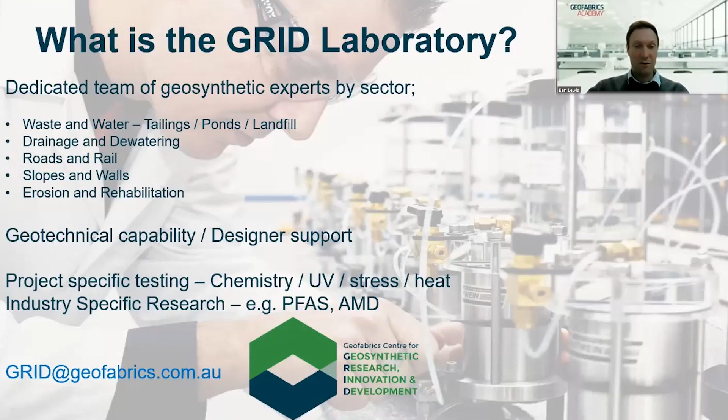But in terms of liner-specific performance testing, we do a whole range of stuff. We're doing UV testing of geotextiles and liners, chemical compatibility and liner protection testing of polyethylene liners. So that's HDPE and LLDPE, as well as GCL liquor compatibility testing. And we're doing drainage testing, shear box testing. So a whole range of stuff that's relevant to the mining industry to show you how it's going to perform maybe on a slope or with the leachate that you're expecting.

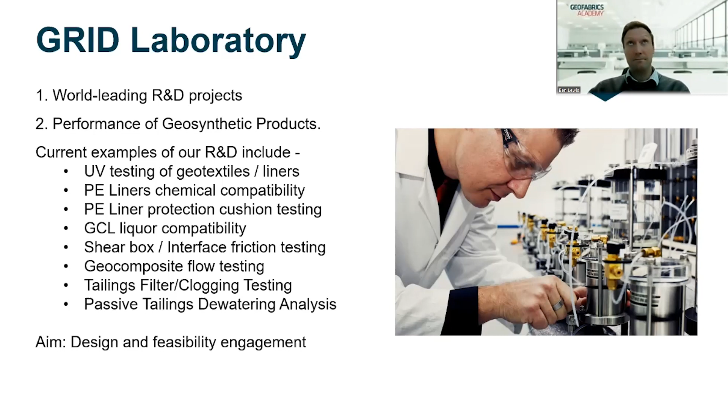So we do have a lab report which shows you what we're capable of, and I can share that with you separately as well.

So in terms of the liner testing, the immersion testing, we can either do one-month screen testing, which allows you to really compare materials. So it's a quick test, basically thin film accelerated testing where they thin the membranes down, accelerate that degradation process. Or you can do it over a 12-month period, which allows you to predict longer term lifespan of those materials. Obviously time doesn't permit to do that always, so sometimes a screen test is adequate, but you do need time up front of these projects to do this type of stuff.

So engaging with us early on is critical. Obviously thermal testing, UV, interface shear, and cushion testing are the primary tests I'd suggest that we do in the lab in the mining sector. So as I said, you do need time up front. It's something that needs to be considered in feasibility, or by the time you get to the design phase, it can be even a bit too late.

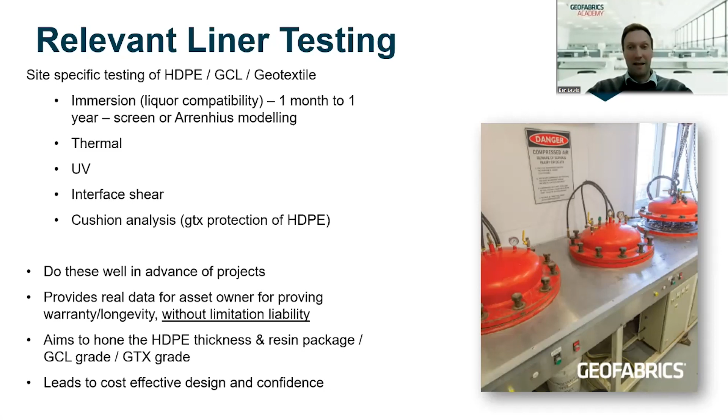So just engage with us, keep in contact. If you've got any questions about durability concerns, we can work through that with you. Essentially the aim is to hone and give you a product which is going to last the standard time in your application. And it leads to cost-effective designs and gives confidence that it's going to last. Sometimes it might cost you a few dollars more, but it's going to last, and you're going to have minimal maintenance on these materials.

In terms of mining applications, the higher risk projects where you would consider doing this might be tailings dams, residue ponds, filtered tailing stacks, processed water ponds, hydrocarbon bund storages - maybe less mining there - or brine storages where you've got high temperature and high saline conditions, heap leach pads, and these all have different exposure risks.

Could be chemistry from heat or heat from chemistry, sun exposure, UV, shear, stresses from trafficking or from loads from heap leach pads, etc. So there's a whole range of exposure risks that are different depending on the application, and so you do need to consider what you're dealing with when you're selecting appropriate materials and specs on those materials as well, because not all HDPE performs the same. There's different grades depending on what you're dealing with.

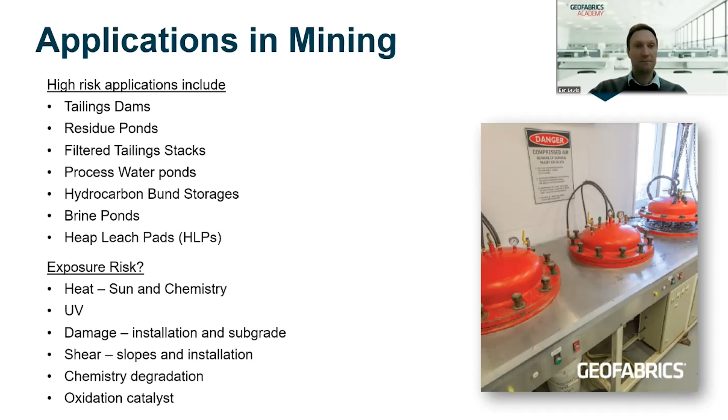Just looking specifically at the tailing storage facilities to give some context to why the industry is probably heading to where it is. By the way, I took this from Circular Mine, so a colleague of ours shared this with me.

Effectively, the industry is heading towards a lot more lining of tailings dams that might have historically been unlined. Some stats for you: 10,000 tailings storage facilities globally, 100,000 active, abandoned and closed facilities. So primarily the closed ones would be unlined.

200 failures over the last 50 years of tailings dams, and that's of failures that we know of. There's probably been others which haven't been published. 2,000 casualties, 20,000 kilometres of rivers and streams polluted.

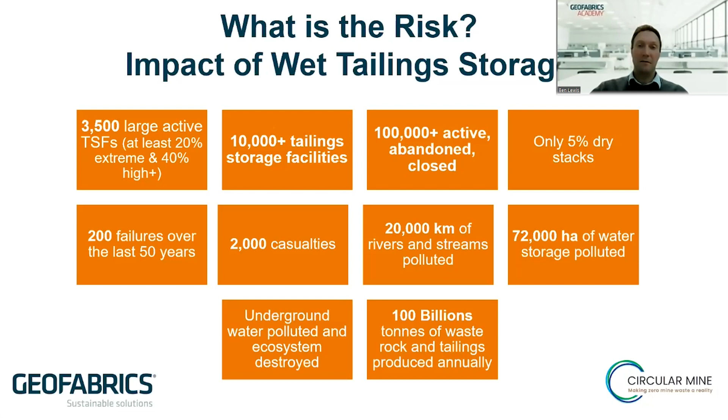So it's just giving you a bit of a feel about why the industry globally is heading towards lining of tailings dams. It really comes down to mitigating risk of these issues occurring.

In terms of how these failures are occurring, this chart just shows you what's the primary cause. Earthquakes, the biggest cause, maybe not in Australia, but certainly overseas. Slope instability and seepage, large causes, and they're probably the most relevant issues that we can have an impact on with geosynthetics.

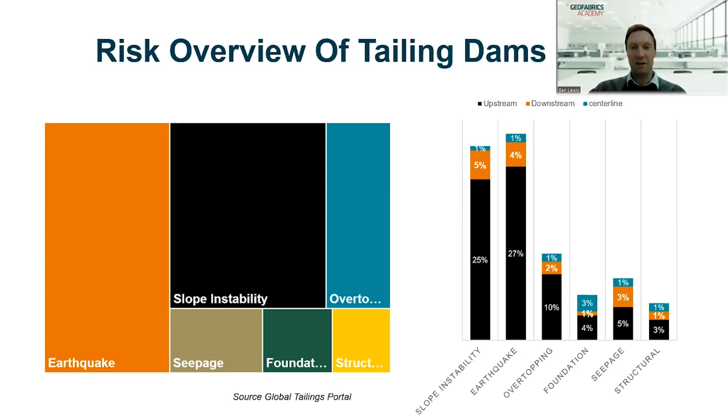So obviously slope instability is caused by maybe slopes that are too steep, saturated, and obviously seepage impacts that, but it also impacts contamination of groundwater streams. And we can generally prevent both of those through good design.

This risk matrix here is just something I developed to show you, I suppose, the risks of each of these storage assets in terms of failures and risks in terms of what's at risk on the performance of the liner. So I'll just go through a couple of these.

TSF, say we're looking at a tailings dam which is holding inert waste. You would expect it to have less stress on the liner in terms of exposure to chemistry. So it's got lower degradation risk, and tailings dams generally have lower hydraulic heads because you've got quite a lot of soil in there. So lower hydraulic heads leads to less risk of, or lower flows through defects, which is good.

But in terms of the higher risk with that particular facility, you've got risk - they're pretty deep facilities, so your embankments are at risk. If you have a failure, it could be catastrophic. And it's also a very long-term asset, so you need to think about how it's going to perform long-term and how that geosynthetics holds up over time.

Now if we're looking at the heap leach pads, they've got very low hydraulic heads as well. It might only be 300 mil deep, similar to a landfill I suppose, but 300 mil deep liquor sitting over the liner. And it would be considered a short-term asset, so you don't need to think such long-term.

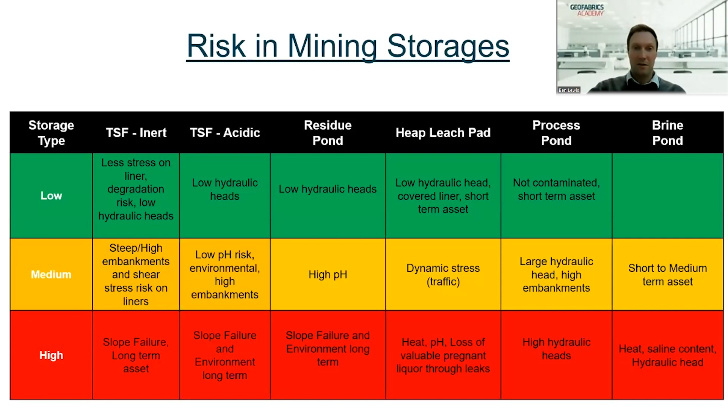So I won't go through the other ones, but you get the idea.

So how do we limit the risk of dam failures? I've touched on the causes, the primary causes that we can impact: slope instability and seepage. And when you combine those two, it can be catastrophic.

But the solution, as I've mentioned a couple of times, is essentially containing and securing these dams through good design of geosynthetics. This tends to result, at least in the tailings industry, in more volume required, filling these dams quicker because it's holding more water than it probably used to. But there are ways around that as well.

You can introduce drainage above the liner and either drain your tailings within the facility and capture that water. Actually, we've heard recently on a job in Queensland where they were using drainage nets above the liner within a tailings dam, and they were getting 10% better water recovery from that net and reusing it.

So one, you're getting the water back; two, you're removing the hydraulic head pressure on the liner; and three, you're reducing the risk of, or limiting the risk of holding water, which adds to the liquefaction risk of tailings dams.

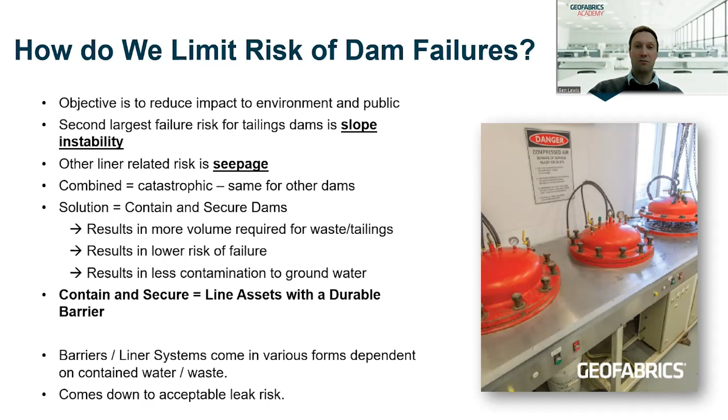But effectively, we're lowering the risk, and this results in less contamination to groundwater when you line. So essentially, the extent of the liner system comes down to your acceptable risk and acceptable leak risk and what you're trying to limit.

In terms of different lining profiles, there's a few, but I've tried to put in the 5 primary examples. At the very basic end, for a shallow irrigation or agricultural water storage, tends to just be single liner HDPE. At the extreme end, you've got double composite liners, which would be HDPE plus GCL with a net, and then another layer of HDPE and GCL. And that's probably pretty rare.

But as I said, there's another job in Queensland recently which included one of these systems, and that was for a brine, saline water at about 40 to 50 degrees C. So it does depend on proximity to residential as well, and the appetite for leaks that they're willing to accept. It also depends on your hydraulic heads, etc.

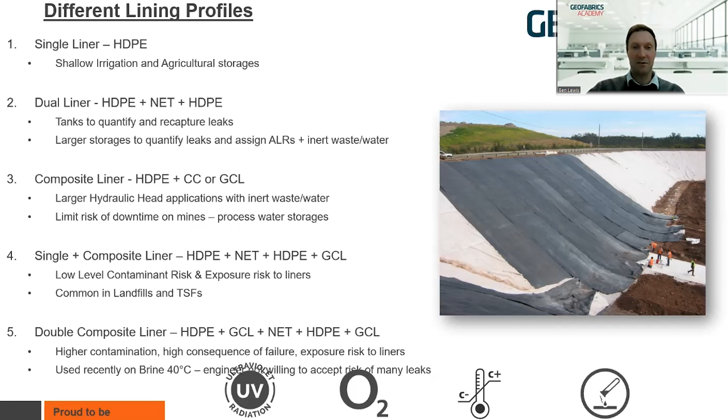How are leaks occurring? They're occurring either through short-term damage or long-term degradation damage. In terms of the short-term damage, it's occurring from poor welding, puncture, heavy machinery. It could be drainage you're placing over the primary liner, or even placing protective material over the top. You can damage it while you're placing it. So it's generally an installation process.

It's worth noting most of the defects are occurring on the floor of these assets through foot traffic or machine traffic, and also that 70% of your defects occur on panels between welds, while only 30% are on the seams. That's important because depending on the job, you might only find it's a requirement to test the seams, which is easy enough, but it's more challenging without the right preparation and materials to test the panels. But we should be testing panels because that's primarily where your leaks are going to occur. It just tells you that seam testing alone really isn't adequate anymore.

There was a good paper here, which I've referenced, where they looked at over 7 million square meters of HDPE installations, and they found an average of 7 holes per hectare. That's quite a lot. It's probably gone up over the years, I think, probably due to the better testing methods. But it's another reason that we should be testing our liners before commissioning them.

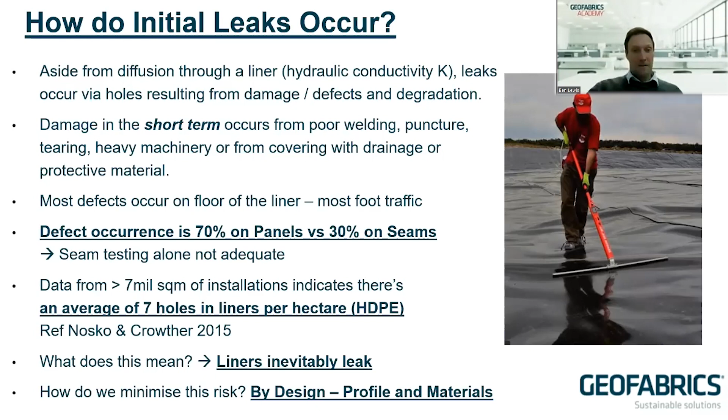How do we minimize the risk? It's by design. Just a quick stat here: the chart on the left is for diffusion rate, hydraulic conductivity through a membrane, a 1.5 mil HDPE, and on the right is a leakage rate through defects. On the left, with a 3 meter hydraulic head pressure over 1.5 mil HDPE, you'd expect about 80 litres per hectare per day through that membrane without any defects.

Through a 3 meter head pressure over a 2 mil hole over a porous subgrade, you'd expect 1,300 litres per day through that hole. So you can see it's the defects that really cause the bulk of the leaks, essentially, and that'll come up later.

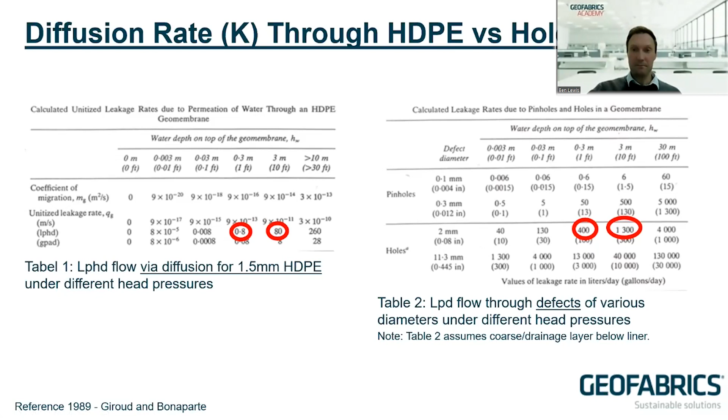In terms of long-term damage, you've got UV, thermal, and thermal can be from natural sun or from chemistry-generated heat. You've got chemistry, low and high pHs, heavy metals, radioactive materials, hydrocarbons, and you've got physical stresses, which could be from slopes, elongation, earthquake settlement, or placement of cover soil. So there's a whole range of things we can look at to limit stress on your membrane to ensure long-term performance.

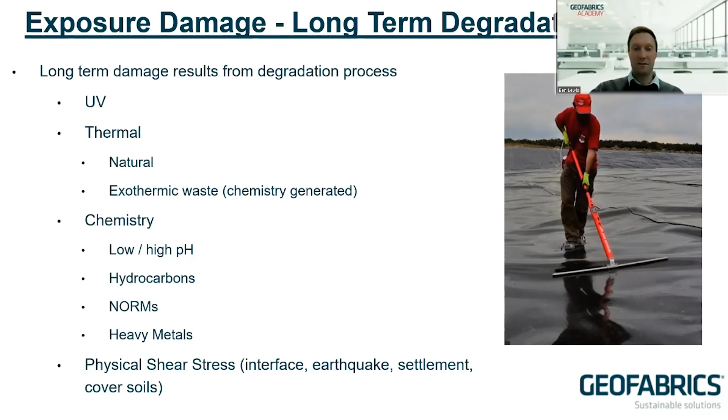So, preventing leaks with cushion geotextiles: all HDPE will expire at some point due to stress cracking. So if we can limit the stress cracking or improve the performance of the HDPE, it should be done.

What we do in the lab is a cushion test, which is effectively profiling up the membrane with a cushion geotextile, loading it up with a site-specific load and compressing it against the expected rock or drainage layer which the cushion and membrane may be in contact with. So if you've got, let's go back to this picture, you can see they've got drainage over the liner here, which has got a cushion or geotextile between it, and the objective is to limit strain to an allowable limit to prevent cracking over time.

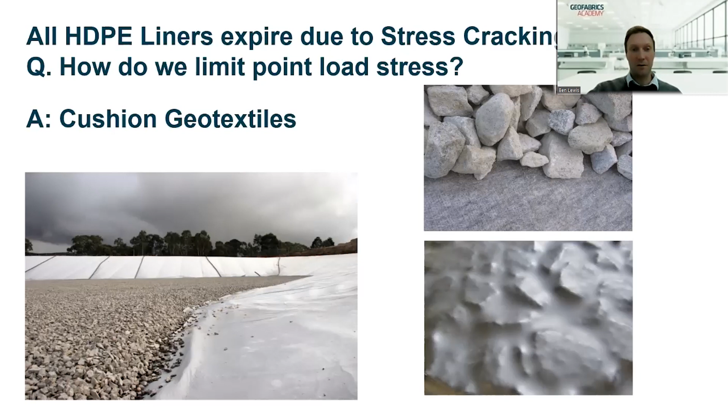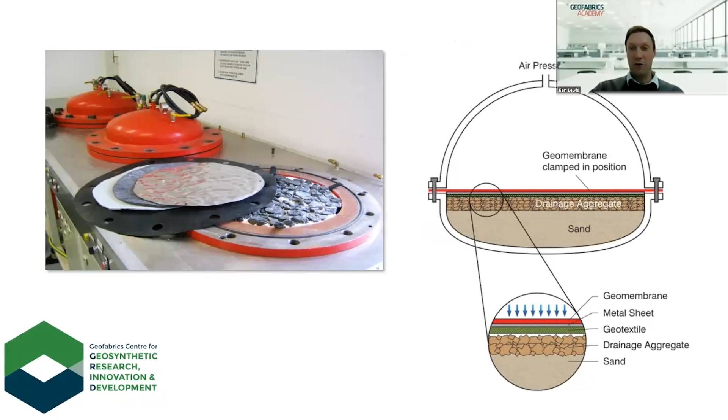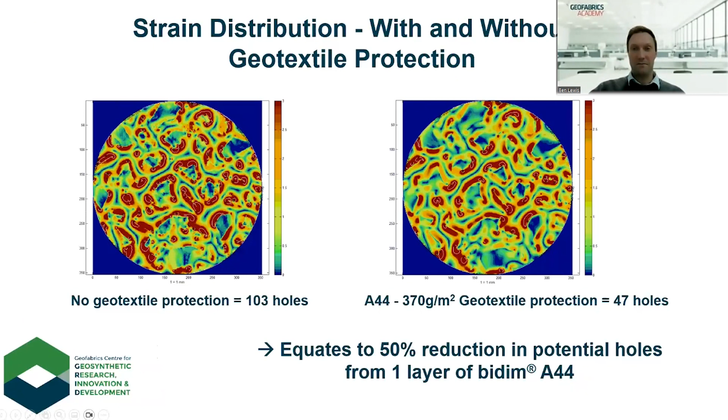So we do that test in the lab, and essentially what they do is take out this thin film which has been loaded up. There's a little thin sheet in there between the membrane and the geotextile, and they run it through a strain distribution profile. What this chart shows you, and this is the extreme case obviously, is you get 103 holes with no protection and 47 holes with protection. So it's a massive reduction with geotextiles.

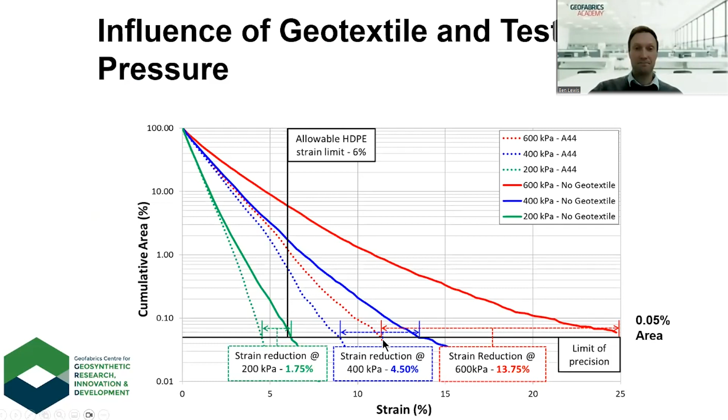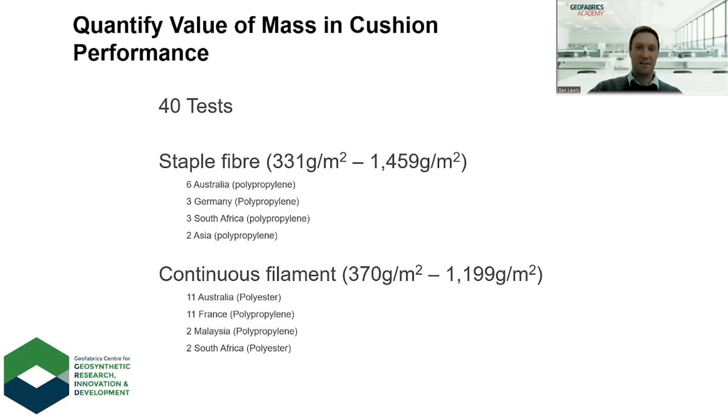So what that does tell us is that we'd have to increase the geotextile grade to something a bit heavier. And then we took it one step further because we're trying to understand what impact the type of geotextile had, aside from just its mass and technical data. We tested about 40 different materials from all over the world and categorized them into continuous filament polyester, polypropylene,

as well as staple fiber polyprop and staple fiber polyester. What it essentially told us was that continuous filament polyester for an 800 gram mass induced a strain over a certain HDPE of 6.5%. And we compared that to a staple fiber polyester geotextile for the same mass, which only induced a strain of 14.3%.

So it really just highlighted that you can't just look at mass for performance of cushion protection. You really need to look at how the product is manufactured, and it was quite clear that continuous filament polyester geotextiles perform far better than anything else.

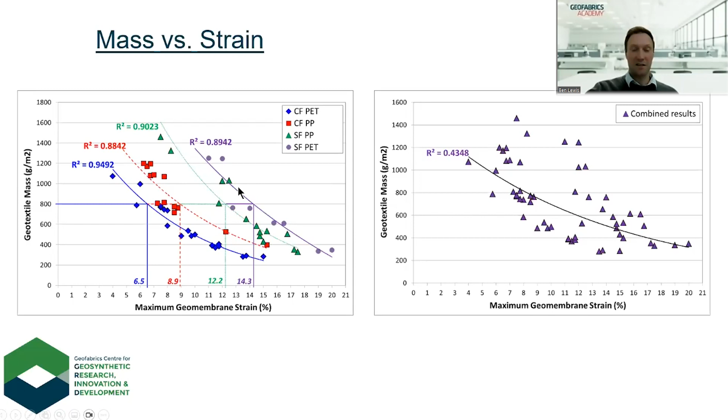This plot on the right is just basically a curve plotted through all the same plots without considering anything else, just looking at mass versus maximum strain. And really the correlation is quite poor - it's 0.4 versus around 0.9 when you start to consider the actual manufacturing process.

Prevention of leaks, spark testing. I won't spend too much time on this, but there are options out there. You can do conductive backed HDPE.

We've got a conductive geotextile, bidim C. Effectively, you're placing this conductive medium below your primary liner, connecting a conductive broom on a cord, clipping it onto the edge of your geotextile, and then walking along your primary liner. And where there's a hole in the liner, you'll get a spark jump and complete the circuit onto your broom,

and an alarm will go off and you'll effectively patch it. So it's a really simple, dry and accurate means to test liners and panels between seams, and it's drastically improving your CQA methods. Until recently, I think the idea was that it was better for flexible membranes because you do want that intimate contact with the primary liner and the conductive layer.

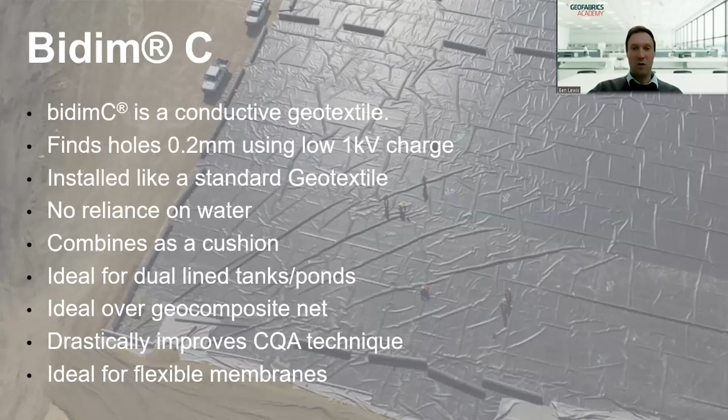But essentially, if you've got a wrinkle there, you can just compress it with your foot, and we've found that it's quite effective. And there's ways to limit your wrinkles through certain methods, and I'll touch on that as well. I'll move on from that.

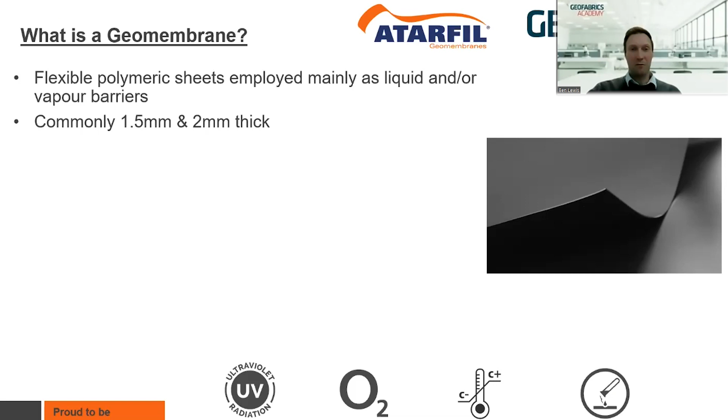So in terms of HDPE and industry improvements, I'll give a bit of an intro. Geomembranes are essentially flexible polymeric sheets employed mainly as liquid or vapor barriers, and they're commonly 1.5 and 2 mm thick in the higher risk industries. They can do 2.5, 3 mm thick, but you'll find, although the benefit is there, the welding installation is much slower, and generally it's not done.

And the variations in the membranes come down to the resin, the formulation and the additives, and the thickness. And these variations are basically establishing the durability and resistance to chemistry, UV exposure, thermal, all those types of things, oxidation.

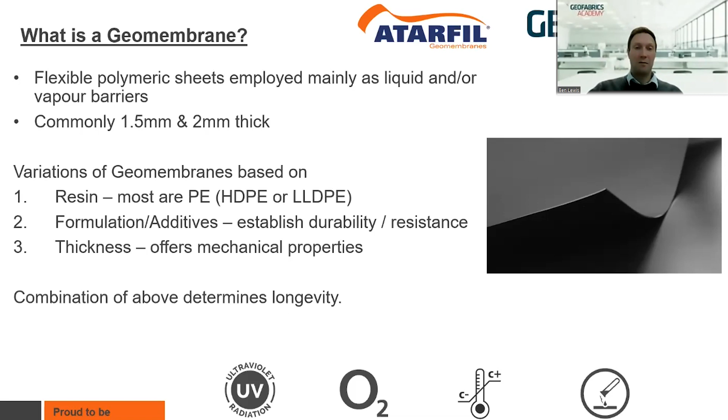So really the key is to understand what your exposure risk is before you select whether it's HDPE or LLDPE, but also when you're drilling down into the performance of each of those as well. There are industry specs you may be familiar with. For HDPE, it's GRI GM13. For LL, it's GRI GM17.

But these days, that would be considered probably more appropriate for your lower risk water applications, where you're looking at higher risk applications.

Maybe you consider looking at certain properties like an increase in stress crack. I think in the GRI GM13, you've got certain HP-OIT, Std-OIT, and stress crack resistant values, which for the high end HDPE at least, are vastly improved. And you can see that in the immersion testing and performance over time. There's also a BPEM guideline for the landfill space, which I'm less familiar with, but it's highly prescriptive. And New South Wales and SA are also following that now as well.

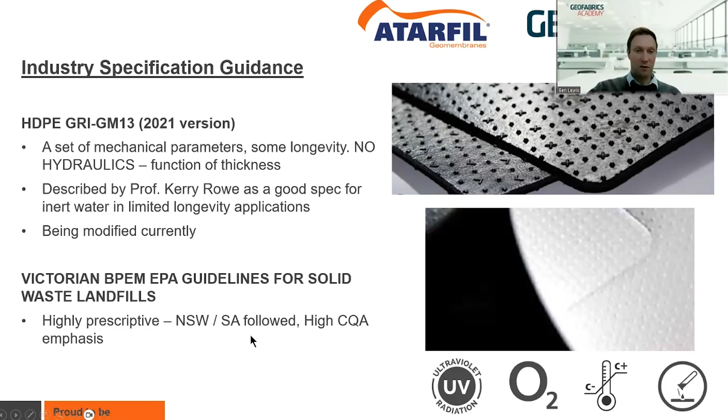In terms of when you might select HDPE or LLDPE, 80% of applications would be HD, but with that you're getting a wide range of chemical resistance, weld strength, and it's pretty inexpensive. That's why people tend to go towards HD. But it does have stress cracking resistance issues depending on the grade, thermal expansion and wrinkle issues, puncture, strain, wind affected. It's quite light, obviously. So there are some issues with it, and it does need to be protected, which is where the design comes into place, but it's still cost effective. And it does have those durable chemical resistance properties.

Whereas LL has better differential settlement properties, so good multi-axial strain, better temperature management, tends to sit a bit more flat, less wrinkles, and it's more flexible. So probably more appropriate for capping applications and differential settlement applications, which is what we tend to see with landfill as well in their capping.

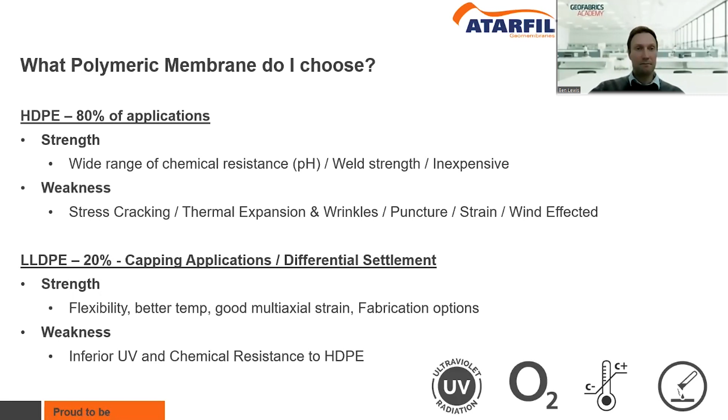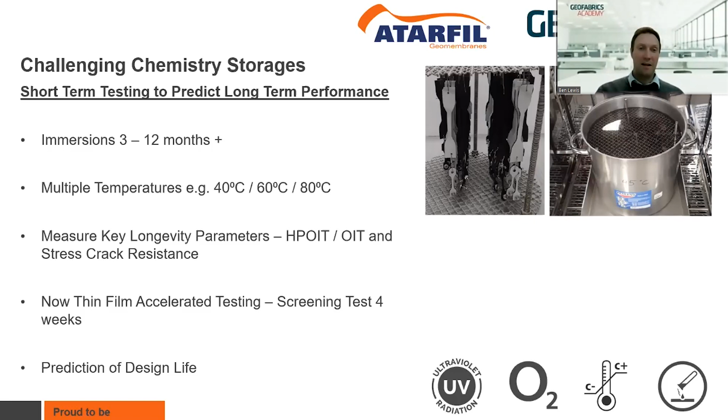In terms of the testing, I touched on this earlier. We can do immersions for 3 to 12 months with HDPE and predict long-term performance. We basically immerse it in different temperatures, 40, 60, and 80 degrees, to try and accelerate that process. And it's really there to compare these performance criteria: HPOIT, stress crack resistance, and assessing how those perform after exposure. So I won't dig into that again, I've touched on that already.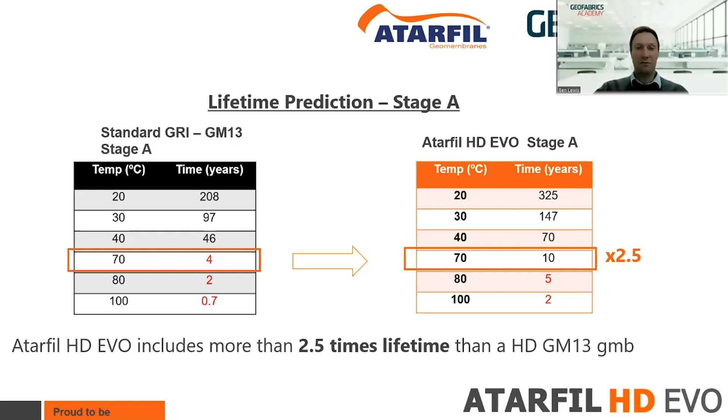I'll just touch on white geomembranes and texturing, because they do have some benefits aside from just aesthetics and slope interaction. White HDPE has been found - this is nothing new, but this is some pretty old data actually pulled out - to reduce wrinkling height and frequency when you use white membranes. That's good for easier installation. It keeps it cool if it's a hot environment, so you can install maybe during the day rather than at nighttime. It reduces the temperature, so it slows that thermal aging process.

There's some stats here as well. These relate to a thin white coating, by the way. We could actually increase the thickness now with these HDPE to maybe 50% of the membrane, and there's even better improvements with these properties. But just looking at thin coating, we're seeing 43% less frequent wrinkles, 33% drop in wrinkle height, and a 27% drop in temperature during the day. So significant benefits, and I've touched on what they are. Now we're actually promoting increasing that thickness to maybe 50% of the material, because you get even better temperature drops and better properties with wrinkling and frequency of wrinkling.

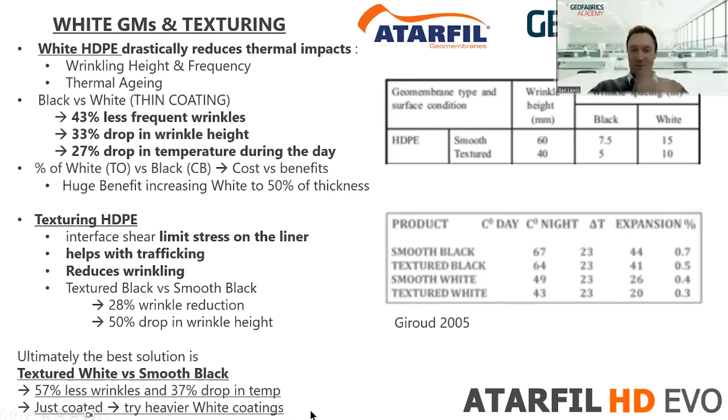Geocomposites, I think the last topic I'll touch on - geocomposites are drains that collect and convey liquids and gases. They're manufactured by bonding a compression-resistant net comprised of 2 or 3 ribs, sometimes laminated with geotextiles. This picture here - the top left picture is a triplanar net. You can see this big thick rib running vertically with the thinner ribs running on either side of it, top and bottom. That's a triplanar net. And the biplanar is effectively 2 ribs, same size, running perpendicular to each other.

Now, the triplanars tend to have higher compressive strength. They do tend to only allow water flowing in one direction, so you do need to place the triplanar nets in the direction of the slopes to allow water to permeate in that direction. They're less creep impacted, and as I said, single flow direction, but they are better for cyclical loads.

So if you wanted to put this under a road, you would probably be using a triplanar net.

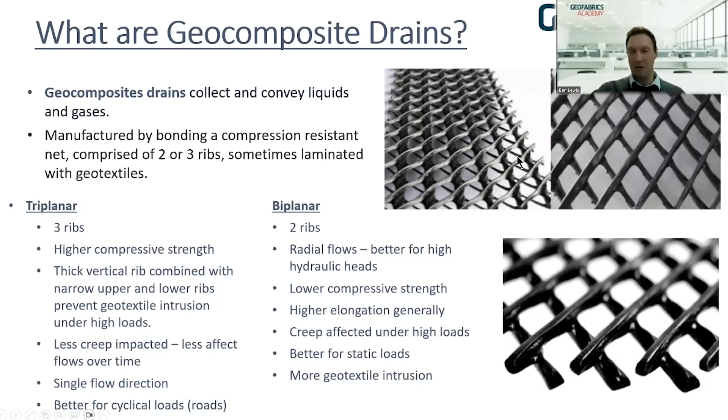Biplanar nets, with 2 ribs, allow for radial flow, so they're probably better for higher hydraulic heads, maybe water storages. They have lower compressive strength though, and higher elongation generally, and are easily affected by creep under high loads, so probably better for static loads. You'll also get more geotextile intrusion due to the makeup of the material. You can imagine if you've got a geotextile over the top of this triplanar, you won't get as much pushing into that flow path.

What's the primary function? In the mining sector, trying to relate this back to mining applications - reducing hydraulic head on liners if it is above the liner, and providing less pressure over the hole, so you get less leaks, or slower flowing leaks effectively.

Reclaiming water - 10% better recoveries we're hearing on other projects. It spreads the load onto the liner if it is above the liner as well, so it almost performs like a cushion. I believe we've got some data on that from the Canman 2 project from years back. That's kind of ideal for heap leach pads where you want some drainage and some cushion protection on your membrane.

It reduces thermal impacts. It's obviously not exposing your liner directly to sunlight, so you see less wrinkling and wind uplift problems on your primary liner. And it helps with foot traffic over the liner as well, and wildlife personnel. So some benefits that you probably don't think about.

In terms of drainage below the liner, we can quantify leaks through the liner, which gives you an ability to qualify the performance of your primary liner. It removes piping and erosion risk below the liner, and gives data to your engineer of record on site, giving them a bit of confidence in how it's performing.

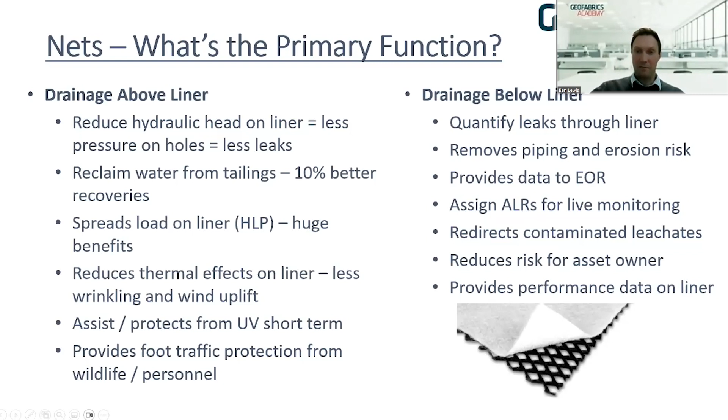And you can actually assign action leakage rates for live monitoring. So you can live monitor your liner, and understand when it's underperforming or performing as it should, reducing risk for the asset owner in terms of failures and contamination of subgrades. So ticking that box with the EPA, and providing long-term data on your liner.

In terms of limitations, considerations, and design risk, generally we consider compressive load capacity - the higher the compressive load, the less the flow rate would be. Also low interface shear on slopes.

It changes with what your laminated material is. Sometimes you have naked nets, and sometimes you've got a geotextile on the net, so you need to consider how that performs on your slopes. There's peel risk - is the geotextile going to peel off and slide as you place fill over the top? I'm just reeling off some considerations more than anything.

Geotextile degradation - covering it before it starts to degrade with UV - and you're obviously going to get some intrusion of the geotextile depending on the thickness, so that will impact your flow rates.

The resin - not too many people think about HDPE resin performance in nets. There was a job done recently in Queensland by Red Earth Engineering, and they made a pretty heavy-duty HDPE net, which you rarely see because there's not too many suppliers that have the capability to do it. But it does tend to have an impact on the creep of the HDPE over time.

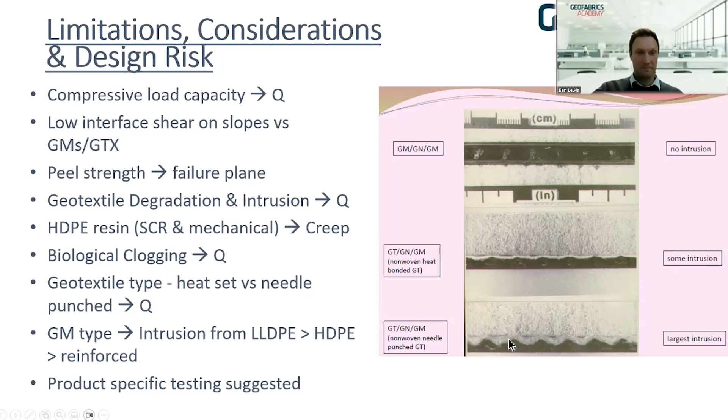In terms of net design, this might get a bit technical, but I'll run through it as best I can. Flow capacity of a net must be greater than the leakage rate, or the action leakage rate that you've set for that asset. Otherwise, if it can't handle the flow rates, it'll choke the flow and you'll get head pressures on your subgrade or secondary liner, which will risk leaking or going into your embankment. So you're really trying to keep your net performing to keep up with the leaks that you're expecting.

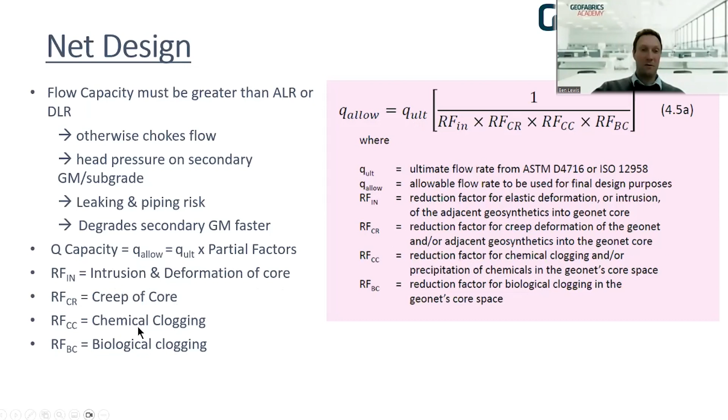So we can work out what the Q allowable will be, and the ultimate flow capacity of a net through transmissivity testing in the laboratory. Then we apply reduction factors to account for site conditions, such as intrusion, deformation of the core from geotextile pushing in, creep of the core, chemical clogging, and biological clogging. So there's a number of factors there.

There is some information on this, and you can do testing to actually work out what these reduction factors are. As a general guide, you could assume best or worst case and apply it. For a secondary leachate collection geocomposite in a landfill, the reduction factor multiplied comes to about 16. That's significant, but maybe for a worst case, particularly in mining and landfills, you do apply that.

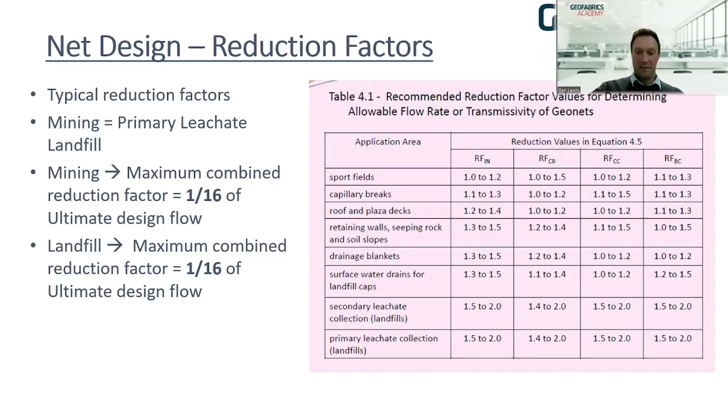So it's just some considerations, because that allows you to work out what type of net you might want to use. Your action leakage rate is generally set by the asset owner or designer, depending on the risk they're willing to accept. For landfills, you can set it as de minimis, essentially 10 litres per hectare per day, which is unrealistic - that's only allowing for no leaks through vapor diffusion. Otherwise, 50 to 200 litres per hectare per day is quite common for an action leakage rate.

For a design leakage rate, that's the point at which they have to take action. It's a bit confusing, but at the ALR you maybe monitor it closely and assess liquid compared to primary leachate. Otherwise, you can set a higher leak rate for when you have to take action and stop filling, maybe start continued monitoring or stop adding waste or water.

Maybe when you have a really high leakage rate - and this is really for landfill where you've got low hydraulic head pressures over the liner - say 1,000 litres, that's quite a lot, and the leachates are quite aggressive. That's when you start to take real action, remove overburden and repair. Mining and water space probably gets away with a bit more. Research suggested that in the US, the average ALR comes to about 5,000 litres per hectare per day, but it's dependent on the contaminant, the risk, and the consequence of the leaks.

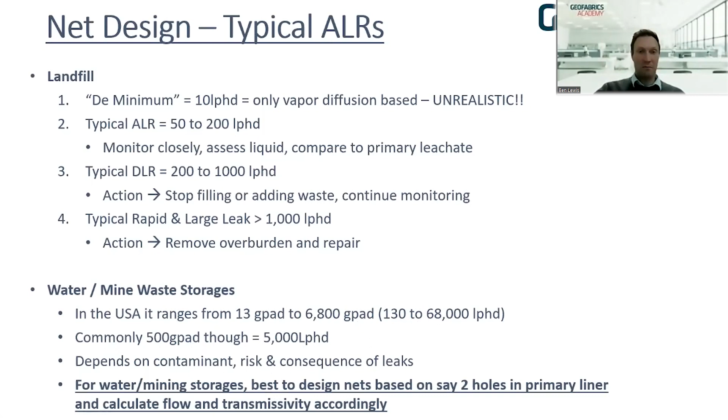Now the example here I've got is - it's quite difficult to accurately select grades of geonets without specific transmissivity testing. Not all suppliers have a huge amount of transmissivity testing. There's always one value on a data sheet, but that's only specific to the compressive load and the hydraulic conductivity, hydraulic gradient, sorry.

So this design example: calculate the factor of safety of a biplanar 6.3 mil net with flows between 2 HDPE liners. The aim is basically to get a factor of safety greater than 3. The compressive load is 30 meters, which is approximately 525 kPa.

Firstly, we want to define the action leak rate, the ALR. Let's say 2 mil holes is the acceptable amount of holes they're willing to accept, and you can work out roughly what the flow rate would be based on that by converting it into litres per hectare per day.

That basically comes to these numbers down here. So we've got Q required - we have to have a capacity in the net for that flow rate, which is 8,000 litres per day per hectare, converted into flow per square metre per second.

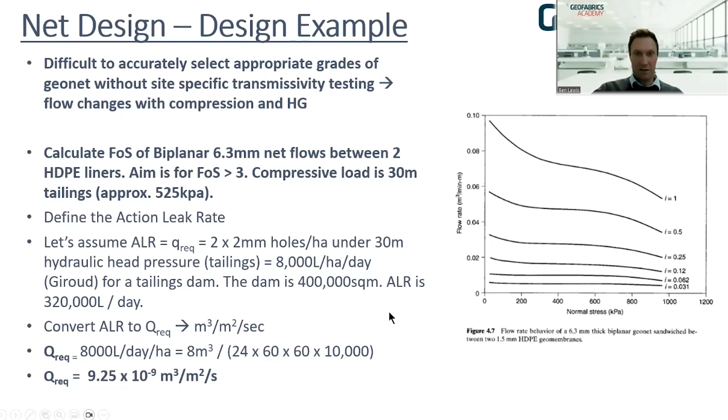Now this chart on the right here is from way back in the day, but it's showing flow rates of a particular net under a compressive load for different hydraulic gradients. As I said, a technical data sheet for a product might only have one specific value on there, so you really need these charts to understand what the transmissivity of a net is under different conditions.

Continuing on with this example - most nets, as I've said, I've gone through that. So this Q ultimate here is the capacity of the net. We've basically pulled that from the data sheet, used this chart to get that. Again, it's probably not going to make a huge amount of sense, so I will skip through this a bit.

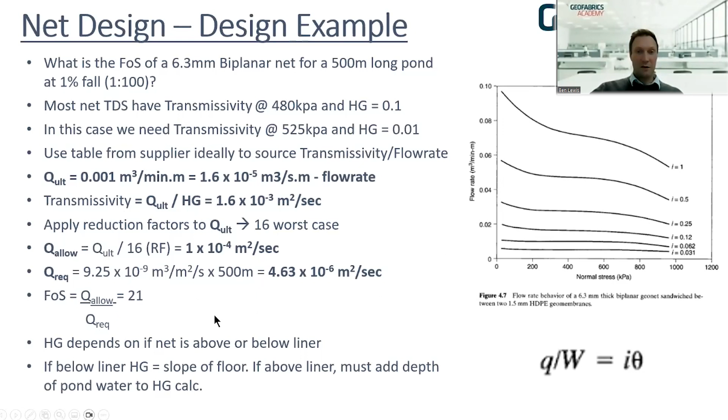But we've worked out the transmissivity, and that allows us to work out a factor of safety. In this case, we've achieved a factor of safety of 21 with the specific conditions of the net and the site conditions. Hopefully that makes sense - I probably haven't done a great job of it, but you can run through that in your own time.

There's a bit on GCLs. I'll probably leave it there, but what I will say - GCLs, I'll bring it back here. I'll just do 3 slides on it, and then I'll open it up to questions.

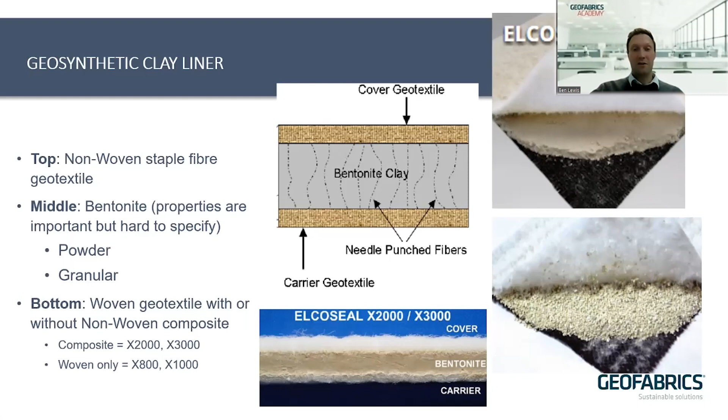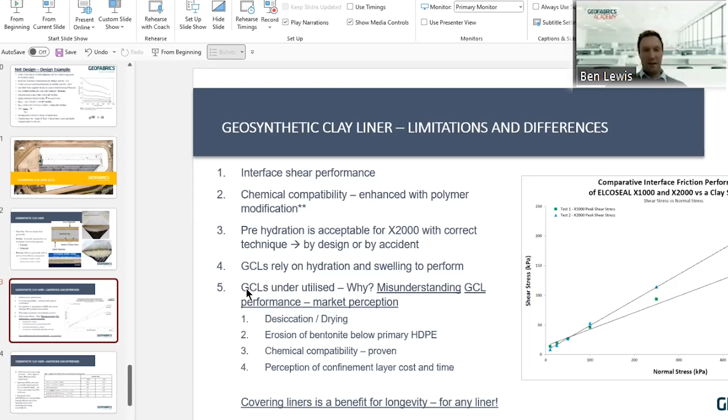And I think GCLs are underutilized. Why do I say that? I think GCL is maybe misunderstood, or people don't understand their capabilities given the amount of testing we've done.

In terms of people worrying about desiccation and drying, we do polymer modify ours with only 1 or 2% of polymer, and that tends to assist with drying properties and desiccation. I mean, it is under 300 mil of soils as well, if you recall. There is data out there, agricultural data, showing that you can get the protection you need from drying, even in really hot environments.

Erosion of the bentonite below primary HDPE, we've got a whole range of testing, I think I've got a chart in a minute, to show that our GCLs do not erode, and that comes down to the way it's made up with the polymer modification. It's actually literally bonded very well to the bentonite we've got, so it comes down to chemistry. It's not just a matter of adding a heap of polymer, because the polymers can wash out if you add too much. But I wouldn't be too concerned about erosion with our GCL.

And we've got tech notes to back that up. Chemical compatibility, I think there's a lot of concern around how GCLs and bentonites perform, swelling or not, with different chemistries. But in reality what you see with GCLs in maybe a higher pH solution is it'll start to limit the swell. That can be bad, but at the end of the day, instead of being 1 times 10 to the negative 11 meters per second, it rises to 1 times 10 to the negative 9. So still in the realm of a compacted clay liner. It doesn't completely destroy the performance, it just increases that hydraulic conductivity value. And again, we've got data to back that up.

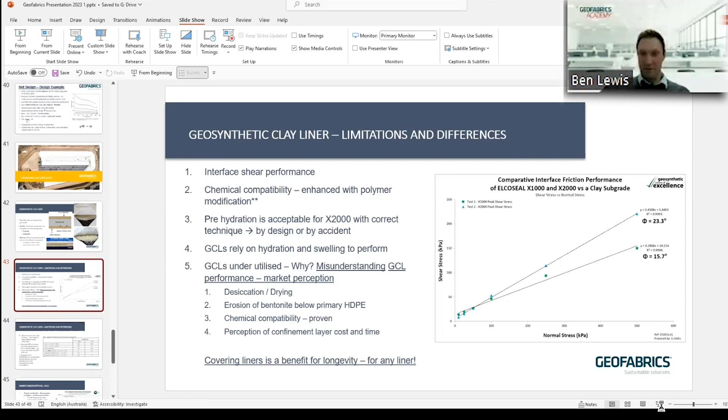GCLs tend not to see as many small pinholes because once they hydrate, they'll swell up and fill those voids, so you tend not to get as many defects, but you will see a higher hydraulic conductivity value. HDPE is the least permeable solution when it has no holes because it has a very low hydraulic conductivity, yet it can often see more leaks than GCL when it's on its own due to the risk of defects during installation. So there are things like that you need to consider, and that's why GCLs really should be protected.

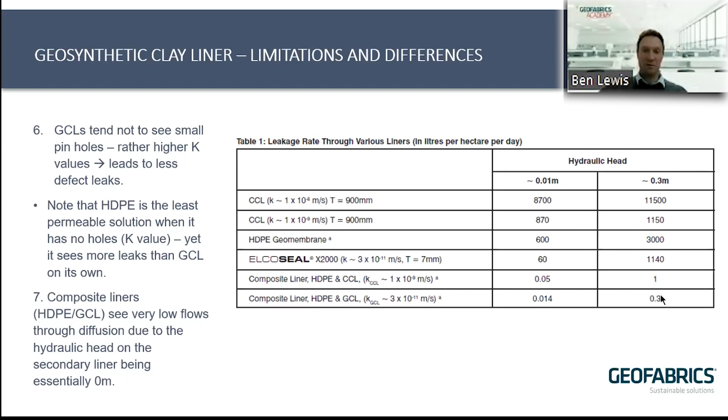I think the perception with polymer modification is that it hides the performance of the bentonite. And in some cases it does, and you'll see that through some GCLs having 20 to 40% polymer added. But we only add 1 to 2%, and it binds very well, so it really only enhances the performance of the bentonite.

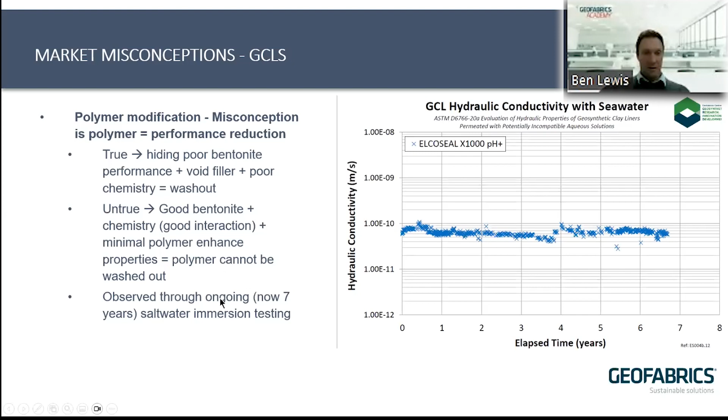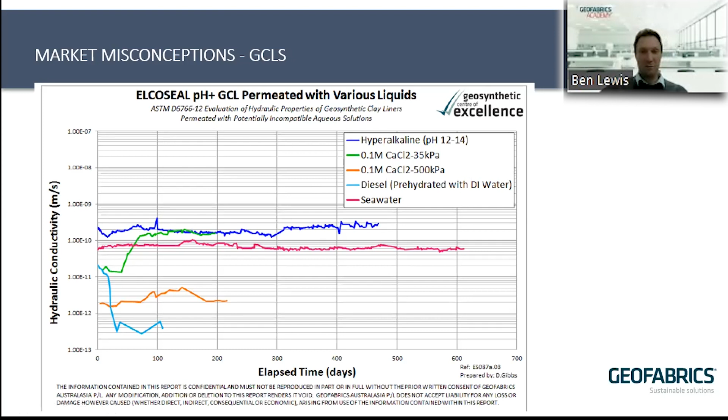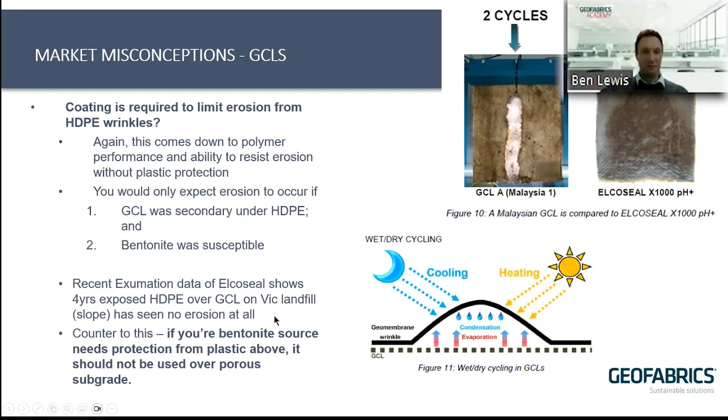This is the last one, I think. And this is just tech note - we've taken this out of our tech note, just showing you how good our GCL does perform when it comes to erosion. There's an industry standard for testing erosion. It comes up quite a lot in the industry with people concerned about GCLs eroding, and that's why a lot of people tend to like the option of putting a liner over the top of it, another liner over the top of the GCL, between the top liner. But in reality, we're confident, and we can show it and prove it, that the bentonite will not erode over time due to the makeup of the material. So I won't go on about that too much, but I think you get the idea.

But that's it, guys. So I don't think I've seen any questions come through as yet.

Q&A, here's one from Raybury. Are there any considerations for cyclical loading, such as tidal ponds that empties twice a day? Are you referring to GCLs? I assume you are. Look, I don't think I've got any specific data on it, but wetlands are commonly used with GCLs, with the cover soils. And I think they perform well. I don't have the data to share on it, but if you want to touch base, I could probably speak to our labs and understand cyclical loading. I'm assuming you're talking about GCLs and cyclical sort of levels of water and maybe hydration and drying. But probably can't answer that one as well as I should, but we can talk after if you like. You've got my email, so apologies.

Well, if there's nothing else, there's my email there. All I'll say is, selecting cost-efficient materials really does come down to how long you want these materials to last. You could choose the cheapest material on the market, but it might only last you 5 years. And paying an extra 10-20% might get you an extra 300% of lifetime, if not more. So you really got to think about it long term, how to protect your membranes, and yeah, we can support you through that process. We can do lab testing, as I said. So just keep it in mind and touch base if you've got any ideas you want to run by us.